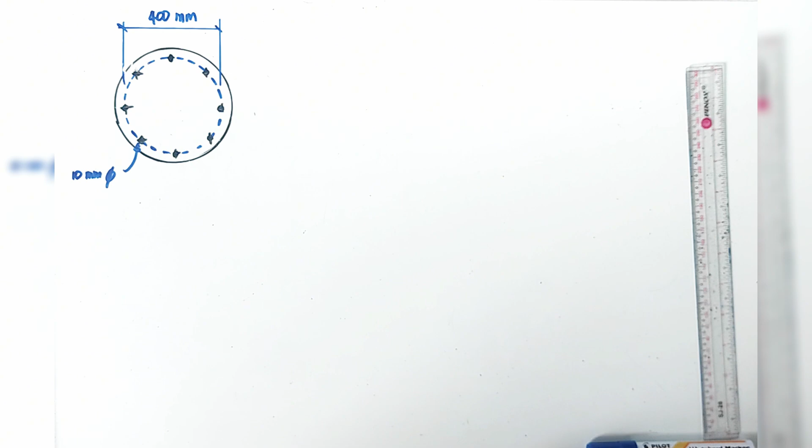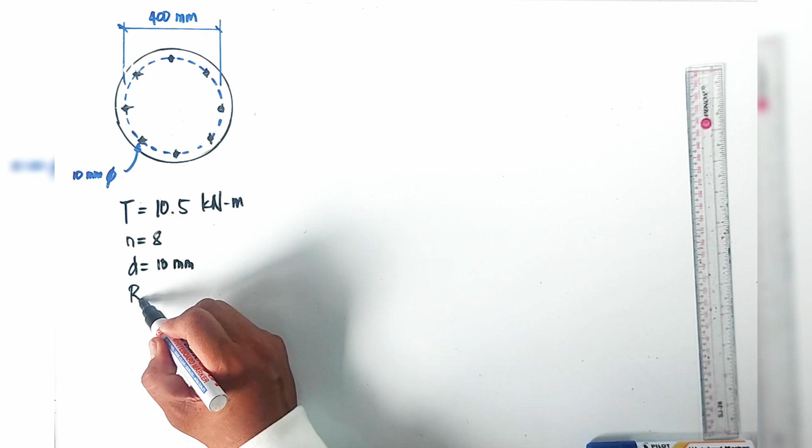Okay, first we are going to check if this connection is sufficient to carry a 10.5 kilonewton meter torque. So we have here 1, 2, 3, 4, 5, 6, 7, 8. The number of bolts is 8. The diameter is 10 millimeters, and the bolt circle diameter is 400. That makes the radius equal 200 millimeters. And the shearing stress is limited to 60 megapascal.

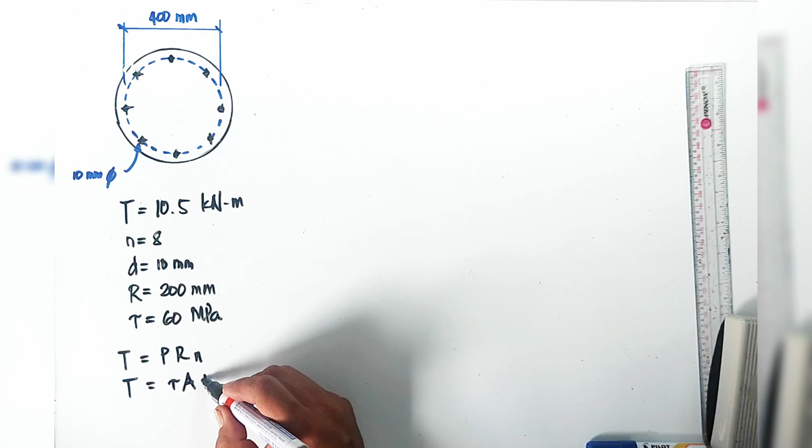So we have the formula T equals PRN, where P is just the shearing stress times the area of the bolt, times the radius of the bolt circle, times the number of bolts. So T equals 60 times pi d squared over 4, times R, times the number of bolts N. 60 times pi times 10 squared divided by 4 times 200 times 8 equals,

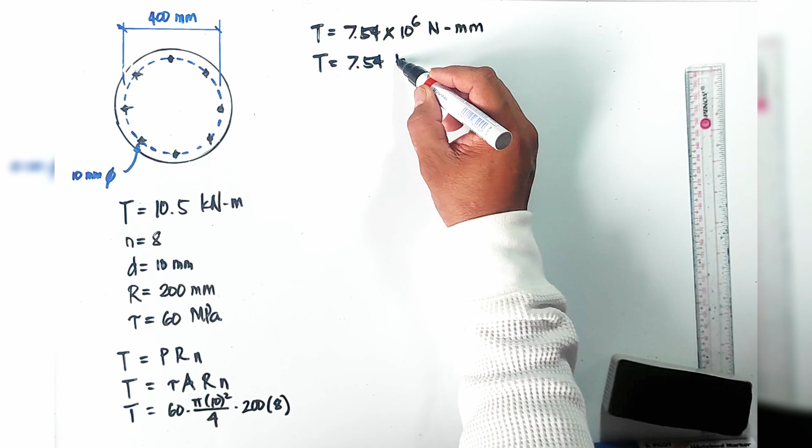so T equals 7.54 times 10 to the 6 Newton millimeters, or T is 7.54 kilonewton meter, which is less than 10.5 kilonewton meter. So that means these 8 bolts arranged on a 400 mm diameter bolt circle are not enough to carry a torque of 10.5 kilonewton meter.

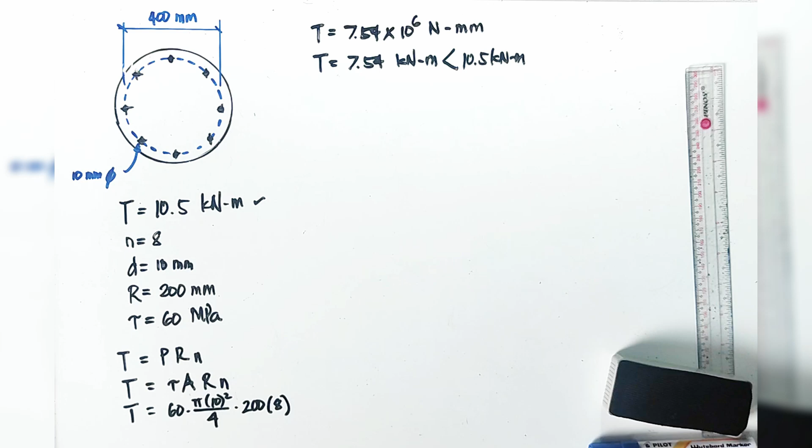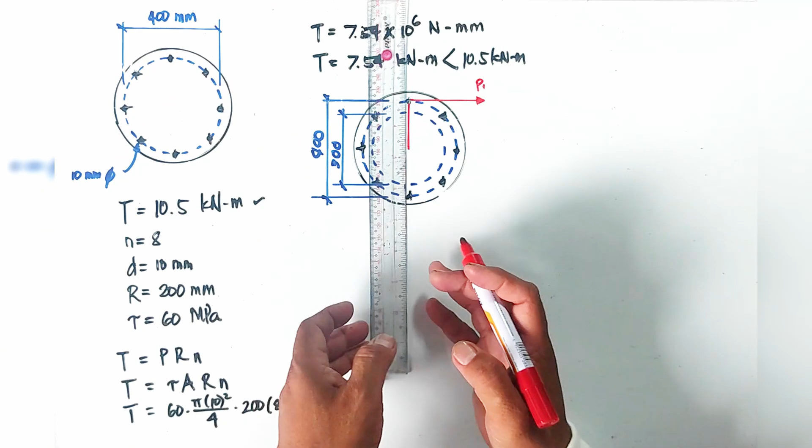So that means we need additional bolts on a secondary bolt circle, and the diameter of that bolt circle will be 300. So this is where the additional bolts will be arranged around this bolt circle of 300 millimeters. So there's a resisting shear force here, let's say P sub 1. And when we have another on this bolt, tangent to this bolt circle, let's call that P sub 2.

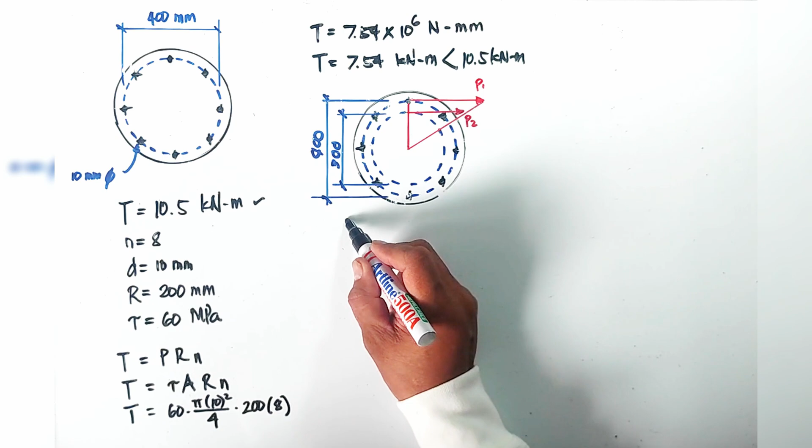Okay. So we do not know how many bolts are needed in the inner bolt circle, because the bolts are going to be made of the same material, steel, and should have the same diameter. That means we can just use a ratio and proportion: P sub 1 over R sub 1 equals P sub 2 over R sub 2. So this will be our R sub 1, and this is our R sub 2.

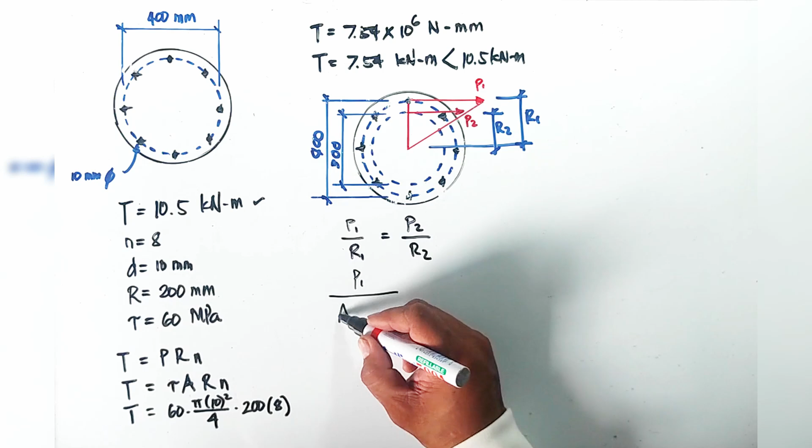For example, if they're not made of the same material and have different diameters, the ratio would be like this: P sub 1 divided by the area of the cross-section of the bolt, divided by the radius of the bolt circle, divided by the modulus of rigidity, equals this. But since they are made of the same material, you can cancel the modulus of rigidity. And because they have the same diameter, we can cancel the area. So we end up with this ratio and proportion.

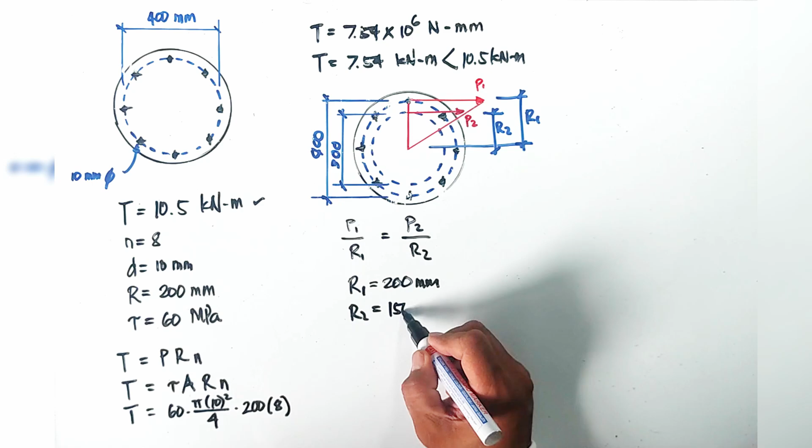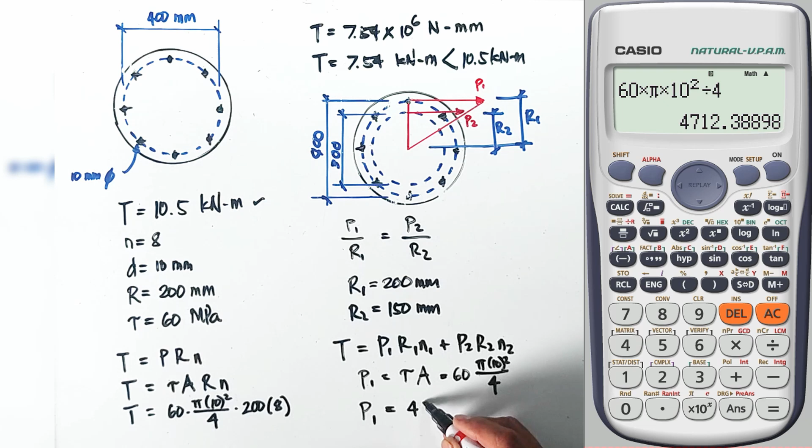So we know R1 is now 200 millimeters and R2 is 150, that's 1/2 of 300. And our torque will be the total of P1 R1 N1 plus P2 R2 N2. Since the maximum shearing stress will occur in the outermost bolt circle, we can solve for P1 using the given shearing stress, which is 60 megapascal times the area of pi times 10 squared over 4. So P1 is 60 times pi times 10 squared divided by 4 equals 4,712 newtons.

Okay, so from here, P1 over R1 equals P2 over R2, and we have 4,712 divided by R1 is P sub 2 divided by R2, and P sub 2 is 4,712 divided by 200 times 150 equals 3,534 newtons.

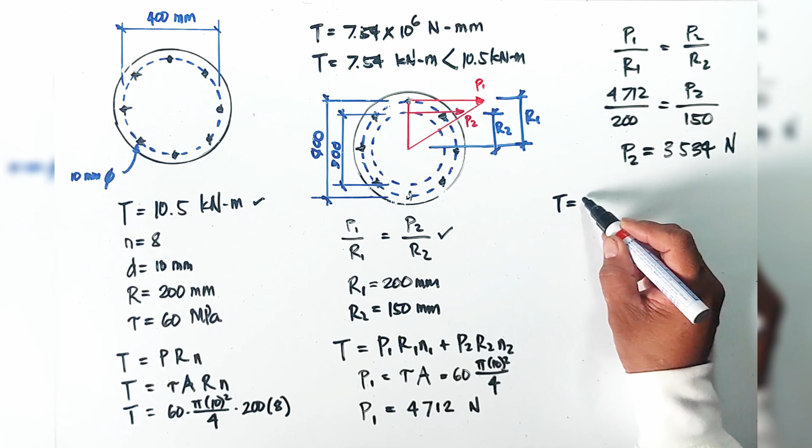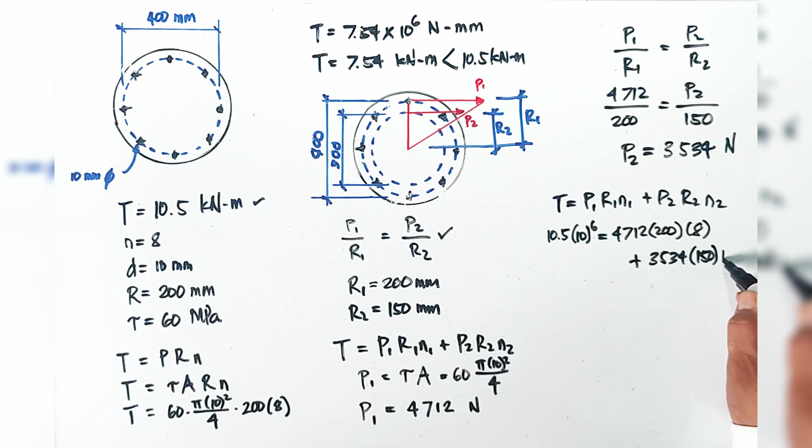So now, T equals P1 R1 N1 plus P2 R2 N2, with T being 10.5 kilonewton meter. We are going to convert that to Newton millimeters, 10.5 times 10 to the 6, equals P1, which is 4,712, times R1, which is 200, N1 is 8, plus P2, which is 3,534, times the radius of 150 times the unknown number of bolts. So N sub 2 equals

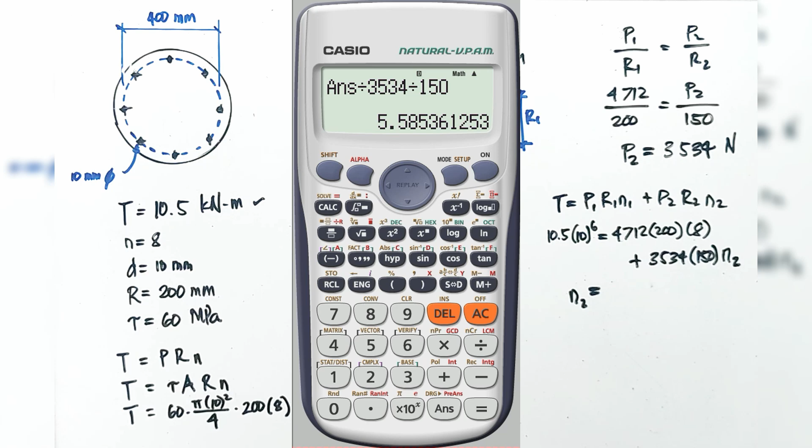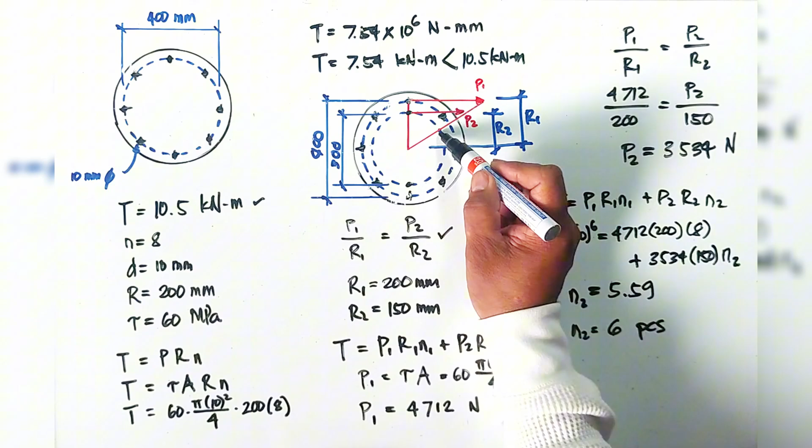10.5 times 10 to the 6 minus 4,712 times 200 times 8 equals, then divided by 3,534 divided by 150 equals 5.59, or say N sub 2 is 6. So that means the outer bolt circle will have 8 10 mm diameter bolts, and the inner bolt circle will have 6. 1, 2, 3, 4, 5, 6.